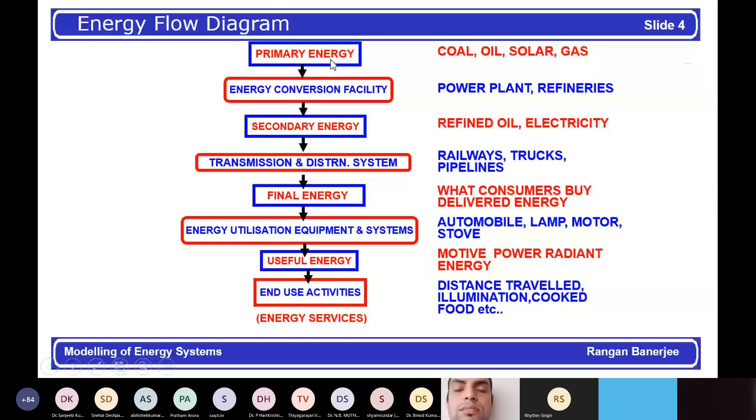Whenever we look at an energy system, it could be something at the consumer side, a transmission distribution system, a power generation system, or a system where you're looking at all aspects of it. So this is in terms of an energy system.

In all of this, we have different types of decisions that we are looking at. We could think in terms of decisions where we are deciding whether or not we should put in a pumping system where you're pumping water. Should I put a variable speed drive on the pump? It's a yes-no kind of decision.

Or I am looking at a boiler or a furnace where exhaust gases are going out. Should I put a waste heat recovery device? This is again a yes-no type of decision.

We could have a best possible among options. I have an island in the Lakshadweep where I want to electrify it. Should I take electricity from the mainland through an underwater cable, or should I put a diesel engine generator? Should I put a PV plant? Should I put biomass? There are a number of different options, and we want to choose the best one.

We can look at a system or a component design. You're designing a heat exchanger, or a maximum power point tracker, or an inverter, or a motor - this is component design. Or you're designing an entire power plant as a system. You have a plant operating, and we decide on operating strategies, or at the government level, we decide policies. So these are all the different kinds of decisions.

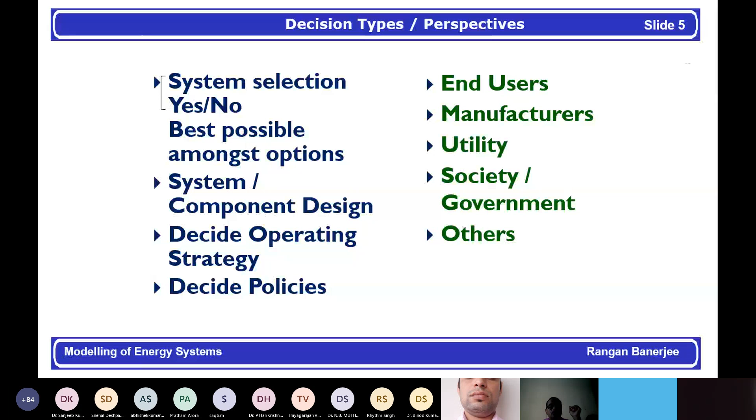Many of these decisions, given that an energy system is linked and complicated, are non-trivial, and we need analysis, and we need these decisions based on sound principles and analysis - that is where modeling can come in. We can look at different perspectives from the point of view of the end user, the manufacturer, the utility, the society, government, or others.

So the question is, what is a model? What models are you familiar with? Why do we need a model? These are the three questions we would like to ask. I'm sure all of you have dealt with models. Can you put in the chat some answers to these questions from your perspective? What is a model? What models are you familiar with? And why do we need a model?

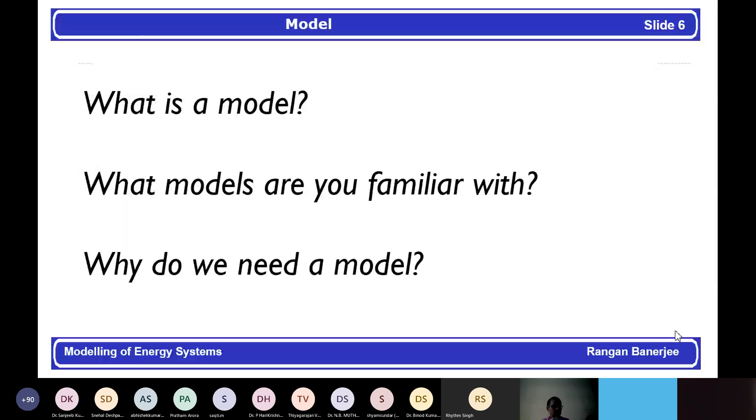Okay, I guess you're hesitant to put things in the chat. Let's just see, you can look at a definition.

The dictionary definition of a model is a replica of something or a representation of something to be constructed. In the typical English dictionary, a model is a replica of something or a representation of something to be constructed. That's a noun, like a model of a building. And as a verb, to model means to produce a representation or simulation of, or to construct or fashion in imitation of. So a model is a representation of reality.

And why do we need a model? Essentially, in all aspects, when we look at trying to construct a building or build a power plant, the actual process of trial and error, making different kinds of equipment or systems without analyzing it, would be a very costly process. So we need to understand a priori, before we actually make it, how it would behave.

In order to do that, we make some assumptions, we create a synthetic system which is very similar to the system that we want to build. We are representing those elements of reality that are relevant to us.

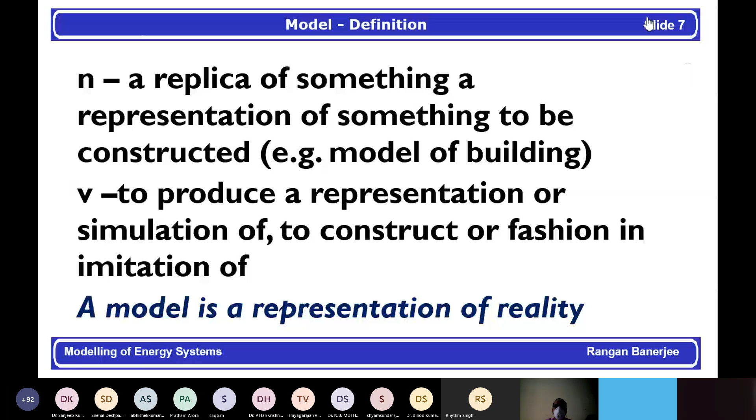So we will make relevant assumptions and create something for the purpose of the decision we are trying to support. It's a representation of reality, representing those elements of reality we are interested in. So we start off model development by defining the goal, why we are doing the model, what decision we are trying to support.

We analyze the situation, identify the variables. In case there is a design element, we can also decide the criteria. We establish some of the equations and relationships between the variables. We analyze the problem, synthesize the problem, link up all these coefficients, and then create the first cut model.

We test that model for internal consistency, validate that model with actual data, and then we have a model that we can use to make inferences and prescribe actions. So that's basically the set of steps in model development.

And how do we decide whether or not a model is good enough? For the same context, depending on the type of decision context, we can have different assumptions and we'll get different types of models. Depending on, suppose you are designing something, many things are open to you, many choices are open, you'll have one particular type of analysis. But once you fix, once you choose and you have an equipment, a power plant, and you want to see how it will perform, then it gets constrained.

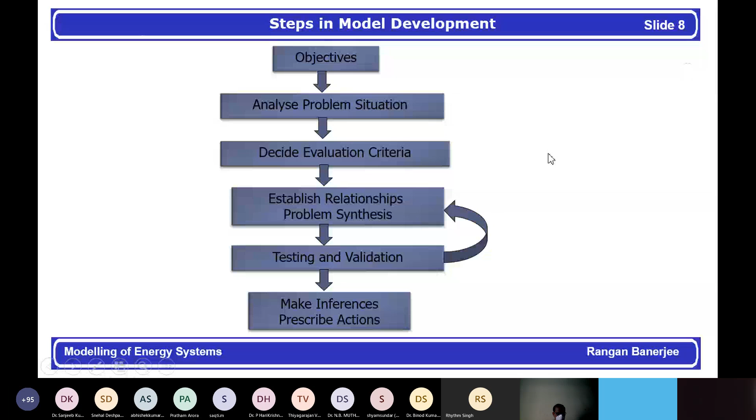Then you have a different type of model. So if you want to find out what is an operating strategy, that would be a different kind of model. Whenever we judge a model, we must look at it in terms of its ability to give the inputs for the decision it is intended for. We also want to see what is the computational effort, cost, and computational time. We would like to judge the model in terms of its accuracy of prediction and its reliability. So these are typically the kind of parameters which we use when we try to do the model.

Now I'll try to give you an example of a model from something many of you would be familiar with. I'm sure many of you are cricket enthusiasts. Are you watching and following the IPL, for instance? In the IPL now we seem to have many of these tied games. The probability of having so many ties in a few games is actually quite surprising.

If you look at cricket before the IPL, the most common and fun form of the game was the ODIs. In the one-day internationals, earlier it used to be 60 overs, then it became 50 overs matches. You had this problem when one team is playing and has played its 50 overs, and then it starts raining, or in between it starts raining. So essentially this was the problem. You must have heard of the Duckworth-Lewis method. What is the Duckworth-Lewis method? What does it do? Please put in the chat.

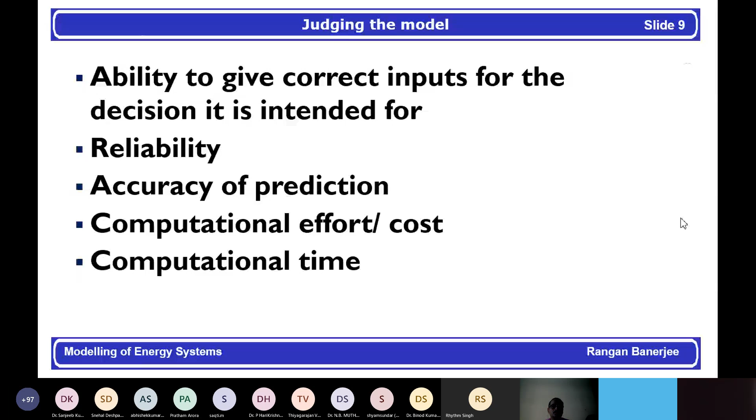Essentially, this is a model, and Duckworth and Lewis are both statisticians. There's a paper, 'A Fair Method for Resetting the Target in Interrupted One-Day Cricket Matches' by Duckworth and Lewis. What they did is analyze the ODI scores and said that the total number of runs you can make is a function of two variables, two resources that you have. One is the number of wickets, and the second is the number of overs. These are the two resources, and then they basically did a regression with the past data, and got a correlation which would adjust the number of overs based on the number of wickets.

So as per the wicket and overs consumed, the run is estimated. You have this estimation, two resources which are overs and wickets, and then an asymptotic average which is calculated based on wickets and the number of overs. These are the correlations that Duckworth and Lewis put together. They put it in the form of a set of equations.

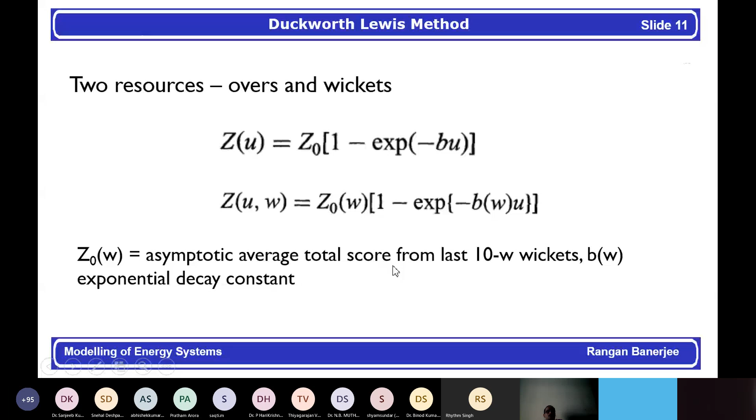They published a paper, and they also patented it. Duckworth and Lewis became millionaires as a result of it. They created a company around this. Essentially what happens is this is an empirical relationship between the different data sets, and that is used to curtail the game -- if rain curtails play, depending on the number of overs and number of wickets, your target gets reset based on this.

There have been critics of this, saying that now the data sets are different as well as the resources are different, and this Duckworth-Lewis method should be modified. There are some papers talking about this, but this is to show you one way in which you can use a model -- using past data to create a correlation, and using that correlation, as has been done in the game of cricket, a game familiar to most of you.

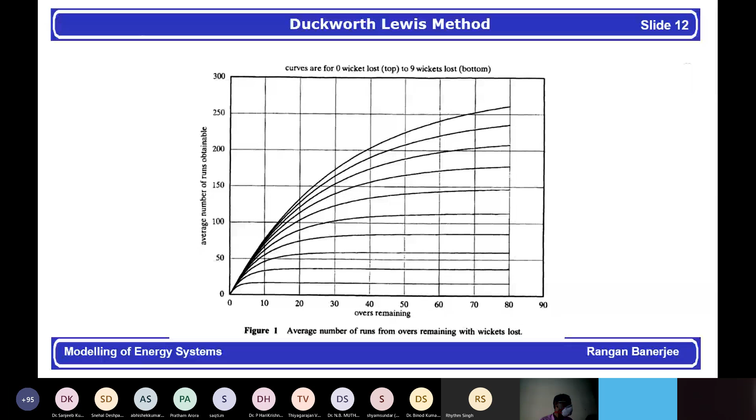So when we think in terms of a model, we have two types of models that we will discuss. One is a simulation model, and the second one is an optimization model. When we talk about simulation, we are looking typically at a system simulation, where a system -- I'm sure many of you teach thermodynamics -- so you look at a system as that area which you are interested in.

In modeling, we look at a system as a collection of different components whose performance parameters are interrelated. We need to club these components together and see what happens when you put them all together. We mean observing a synthetic system that imitates the performance of a real system.

For instance, I have a pumping system in a remote location, currently running on an electric motor. The power supply is erratic. Someone is willing to donate me a diesel engine. I want to know if I connect the diesel engine with the pump shaft, how much output would I get?

So I know the diesel engine characteristics, I know the pump characteristics. I correlate these in the form of equations, put them together and create a synthetic system with these two, and then see how it would perform. This is a simple example of a system simulation.

Why would we like to do a system simulation? Often, when you put different components together, you are looking at something which is an off-design point or an operation at part load. You would like to see how your whole system would work without actually first building that system. That is what system simulation is.

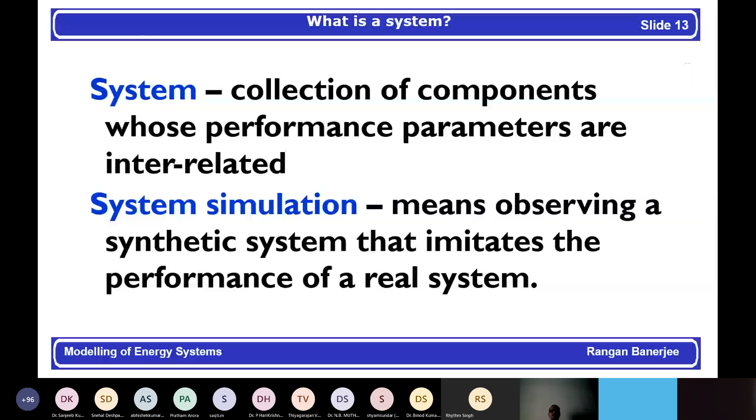For system simulation, what would we need? We would need the characteristics of the different components. Let's say we have a power plant. We would like to see what is in the boiler, which fuel we use, what are the characteristics of the boiler. Then it goes through some heat exchangers, a superheater, a turbine, the condenser, a boiler feed pump. Each of these components has its own characteristics.

When you link them together, you get a model which tells you how the system would work. You need the properties of working substances. In this boiler-steam example, we need the properties of water and air, and we need the conditions imposed by the surroundings and environment.

With all of this, we get a set of equations which characterizes the equipment we have. In this case, this is completely specified, meaning there are no degrees of freedom. We can see under different conditions how it would perform, and that is called a simulation. You put in some input variables, the number of inputs and outputs are the same. You form a set of equations which you then solve.

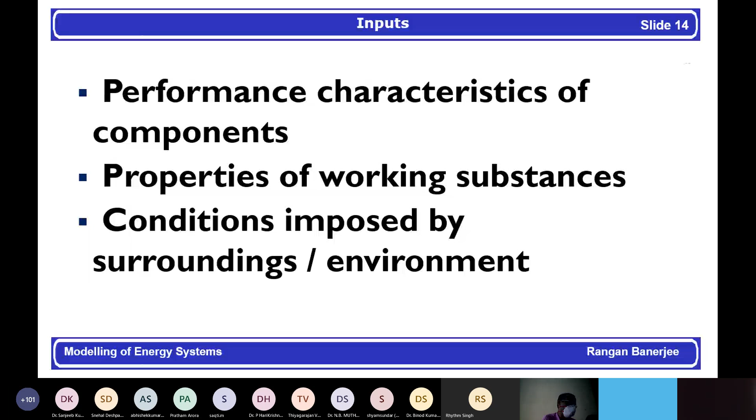On the other hand, you have situations where you have the possibility of design and choice, and variables that you can choose. That means you have some degrees of freedom. When you do that, typically what we do is we optimize—we try to get the best performance.

If you see the classic book on optimization by Beightler and Wilde, it says man's longing for perfection led to the theory of optimization. The German philosopher Leibniz, in the 1700s, said the aim of princes and philosophers is to improve. So in everything we try to do, we try to maximize the good or minimize the bad. That is the theory of optimization.

We try to create a function which correlates whatever parameter we are trying to maximize or minimize, and based on that we make our choices. This is called optimization. We put down all the equations and constraints—some from the variables, some from the external environment—and based on that we set an objective function, which may be minimizing cost, maximizing reliability, or maximizing output. This is different from simulation, because in simulation everything is specified.

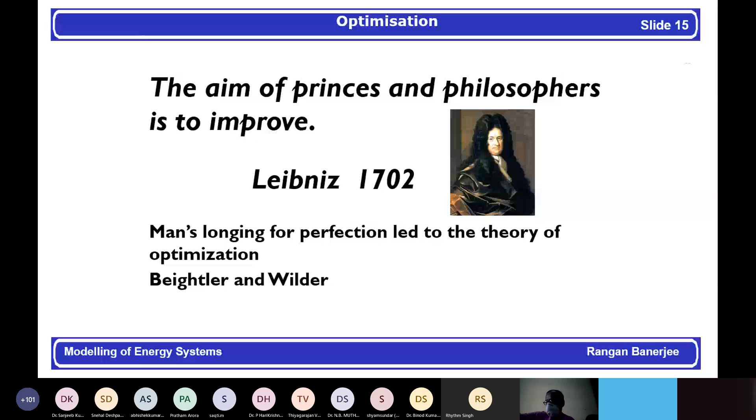In simulation, we just run it and get what the operation will be, what the sets of variables are. In optimization, we are exercising our choice. There is a value judgment in deciding what your objective function is, and we are either trying to maximize or minimize. So these are the two categories of problems—simulation and optimization—and these are the two different categories of models that you would encounter.

Typically, in a necessary condition of optimization, it would need to have an underdetermined system where there is a degree of freedom greater than 1. We would have an objective, and there would be constraints or restrictions, and typically there would be competing influences.

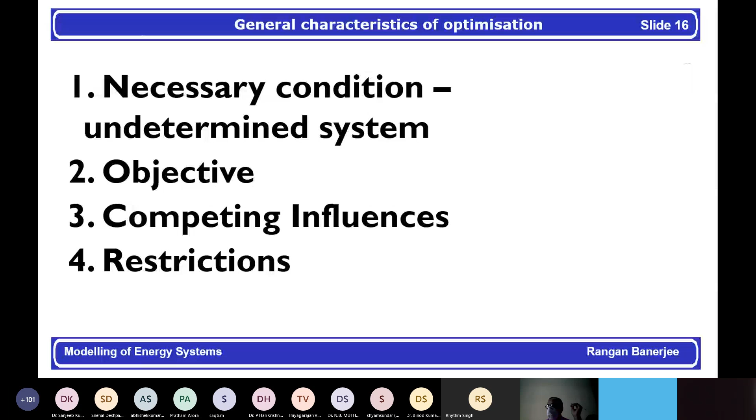So if you look at a pipe carrying hot water and you're looking at putting insulation on that, what happens is if you increase the thickness of the insulation, the capital cost that you have initially to put the insulation, some fixed cost and a variable cost, as you include the layer of thickness, the capital cost starts increasing monotonically with the thickness. And the operating cost, what happens is that the heat loss starts decreasing.

Because the heat loss starts decreasing, your fuel cost gets decreased, your operating cost gets decreased. You can take the capital cost, annualize it, and get a total cost. And because you have these two competing trends, one is operating cost starts decreasing with thickness, and then it sort of converges, and the capital cost starts increasing. Because of this, you have the competing influences and you get an optimal thickness at which you can operate.

So this is just to give you a very simple example to illustrate the trade-offs that are involved and the reason why you would have an optimal. And now, depending on the characteristics, you can have a fairly complicated set of equations and constraints, and you can go ahead and derive and then get what is the thing. So in all of this, you would have some elements of reality, some elements of assumptions, and with this we identify, create the model, and then do that.

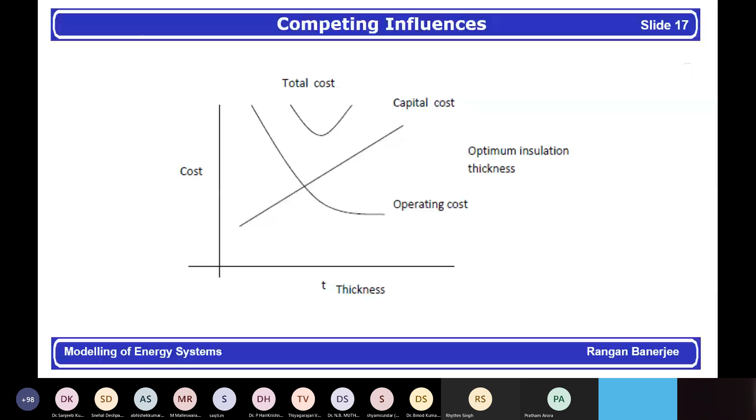We talked about in an optimization scenario, different types of criteria. Usually, most of our decisions are based on costs, either the initial cost, operating cost, or the life cycle cost. We can also look at reliability, availability, or unmet energy in an energy context. Increasingly, most energy systems are now focusing also on emissions, and we can look at local or global emissions. We can look at sustainability. We can look at equity. There are many different types of criteria, and sometimes we also run it with multiple criteria.

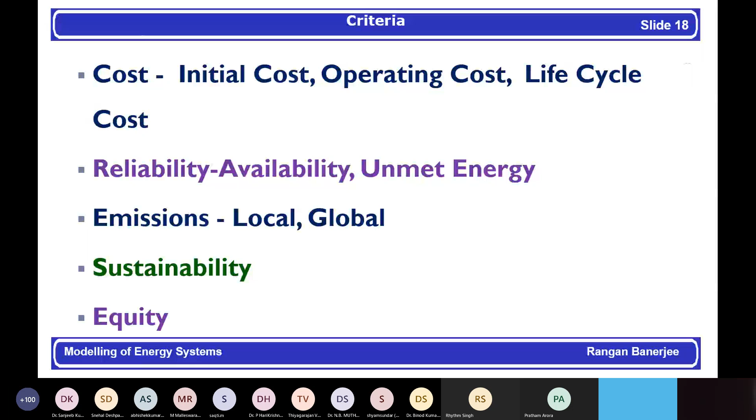Now, it's not necessary that we always optimize, and this is something I would urge you to read these papers. Professor Herbert Simon, he was a Nobel laureate, a professor at Carnegie Mellon University, and he talked about rational decision making in business organizations. He came up with this concept that when you have a large number of options, it is very difficult for any individual or company to really explicitly consider all these options. So you have this bounded rationality, and you need to look at a subset of these options.

Often what happens is that we don't necessarily have to go for the best. We can satisfice - that means any solution that meets our constraints and is within a particular cost and is good enough, and we don't necessarily always need to think in terms of the best.

You look at your decision in terms of how you spend your time, whether on your work, on your preparation for your lectures, on your research, on different kinds of things, and the time which you give for leisure. If you want to create an objective function for yourself, maximizing some kind of utility, you can try and find out what would be an optimal set of things with a different set of constraints. But in many cases, as long as you meet each of your deadlines and you have a certain amount of leisure time, you are fine with whatever solution you get. It's too much trouble to try and find an optimum.

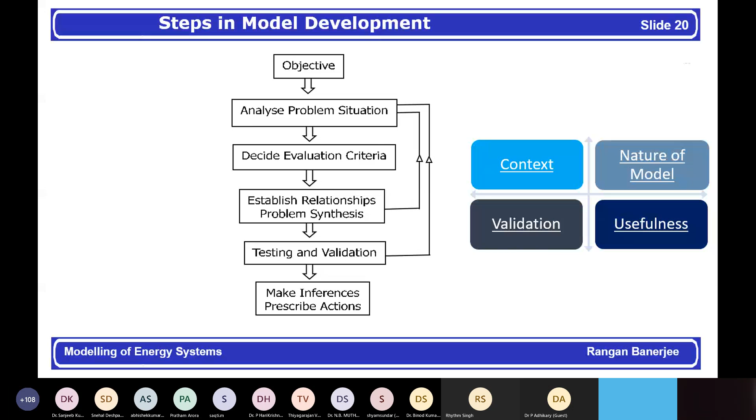We can look at equipment design, and I've got an example of that. We can look at system design - for equipment design I'll talk about linear Fresnel reflectors, for system design I'll look at a glass furnace. I'll talk about microgrids and some buildings. Potential estimation, solar PV, system integration again PV, and policy modeling, one example from energy.

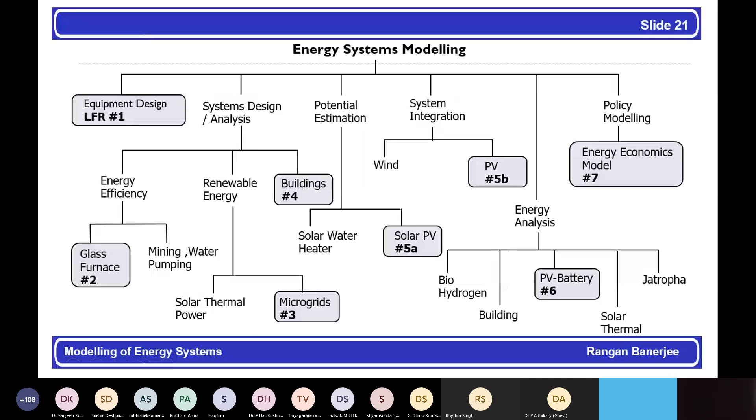So there are about 7 examples, and I've added a few more in each of this - in this case we have 2 examples here and 2 more there, so about 8 or 9 examples. We'll quickly give you a glimpse.

This is an equipment design example. Here the idea is that you have these Fresnel reflectors, where if you look at a parabolic trough collector, if you Fresnelize it, you cut it into sections and make them linear Fresnel reflectors going towards a receiver. Now we want to find out, for this trapezoidal receiver, what would be the heat loss from its surface.

So you have this receiver getting heat from the mirrors, the reflectors, which are reflecting onto it. You have the working fluid, which is water, getting pressurized and heated and going into two-phase flow. We are trying to see, based on the design of this, what would be the performance and what would be the heat loss from this system.

There's an experimental setup which we did along with an industry partner, KG Design at Coimbatore, and we put thermocouples at different points. This model was to design the receiver, and we are looking at 2-dimensional heat, mass, momentum, and energy balances. We used the CFD code Fluent, and then we built correlations for Nusselt number in terms of the Rayleigh number and different characteristics.

So we got an improved understanding of heat losses from LFR cavities, and the effect of variation of different design parameters. This could be useful for component design.

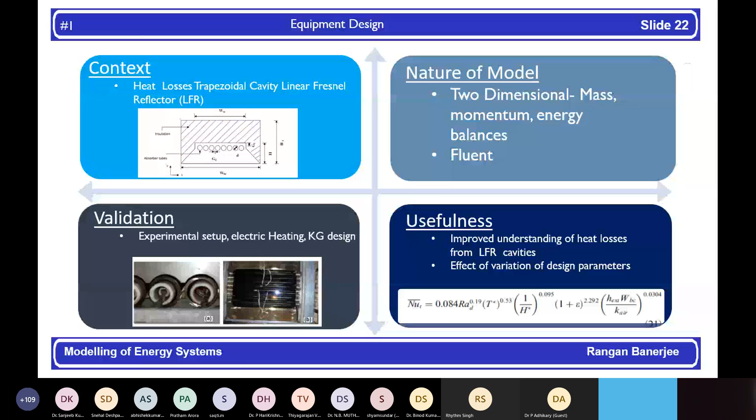So this is the kind of correlation you can see, and these are the Fluent lines which show the temperature profiles and the heat loss from the surface. This is the total heat loss as a function of the tube temperature. So this is one example of a component-based simulation.

Just to give you an example, an indication of how these Fresnel reflectors are used, this is a plant that we built.

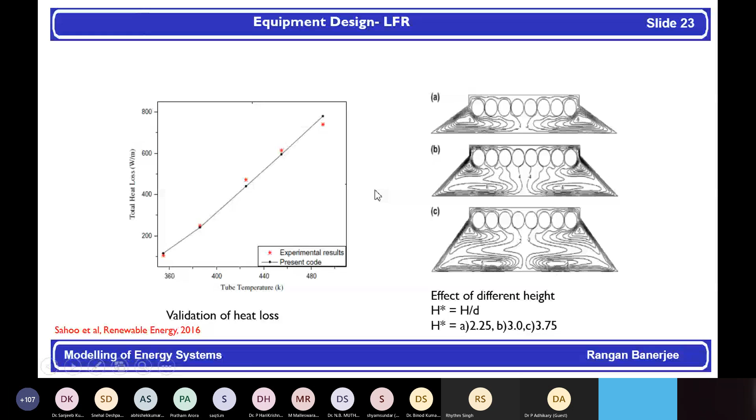We were involved in this as IIT Bombay as part of a consortium. These are parabolic troughs, and these are Fresnel reflectors supplied by KG Design, where we take the water, heat it, and get steam in two-phase flow. This steam gets superheated with the heat transfer oil, and we have a 1 megawatt output.

So this was a test facility that we built. We also had, in the plant, this kind of configuration: this is the oil field, this is the steam field, and this is the turbine.

In this, we built a simulator because this was a 1 megawatt plant, but we wanted to be able to simulate the performance of this plant and then use it for different kinds of plants with different capacities.

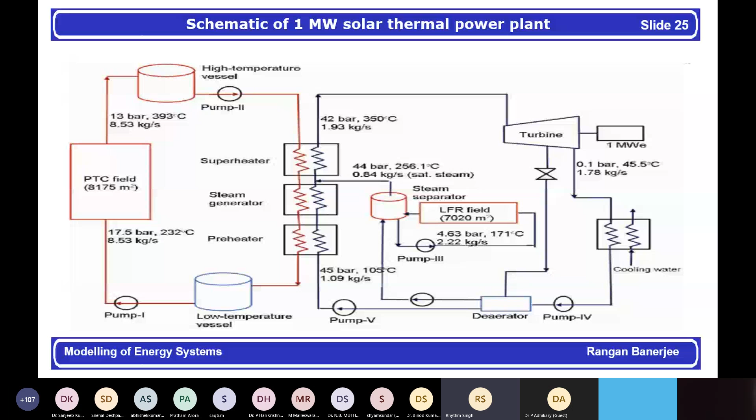So we had this simulator where you can use this performance data, and then you can actually configure different kinds of plug and play collectors, Fresnel reflectors, the turbines, and then see how it will perform.

So you can design a 50 megawatt plant and do this. The idea and objective was to scale up. We validate it using the characteristics that are there, and then move on. So we looked at equipment design and system design for solar thermal.

Let's look at a second example. This is for energy efficiency. We are looking at the process of glass making. It is a very energy intensive process. So we wanted to create a model for the glass furnace and see what is the best performance an existing glass furnace could have. We were also looking at possibilities for waste heat recovery.

So what we did is we broke up the furnace into different zones. We did mass and energy balances. We got heat loss correlations. We then took this model and validated it from industry, doing field measurements for 9 industrial glass furnaces.

Then we created an industry workshop. The idea is that any industry can use this model to put in their furnace characteristics and find out what is the ideal target specific energy consumption per ton of glass, and then compare it with this.

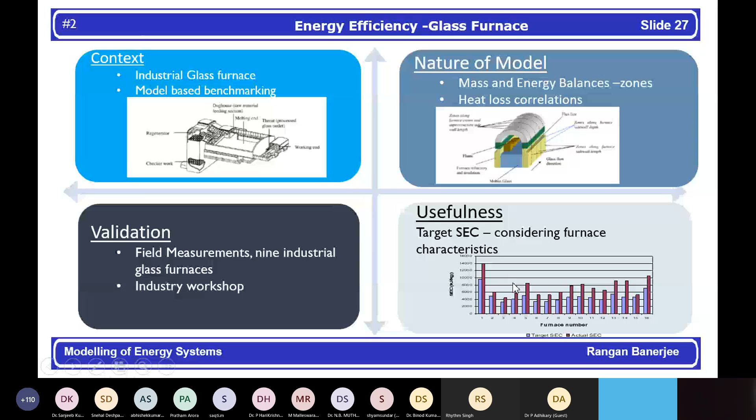This graph shows the comparison in the workshop for the industries that attended and tried to put this in. If you look at this, it's an information flow diagram which looks at all the variables.

You have the air flows and gas leakage, the fuel and stoichiometric calculations, the calculation of the glass reaction, the furnace geometry, combustion zone, regenerator, heat of reaction, and then a total energy balance and fuel calculation.

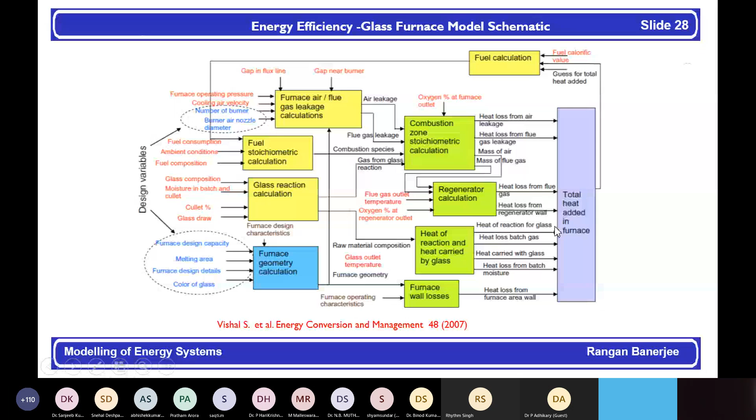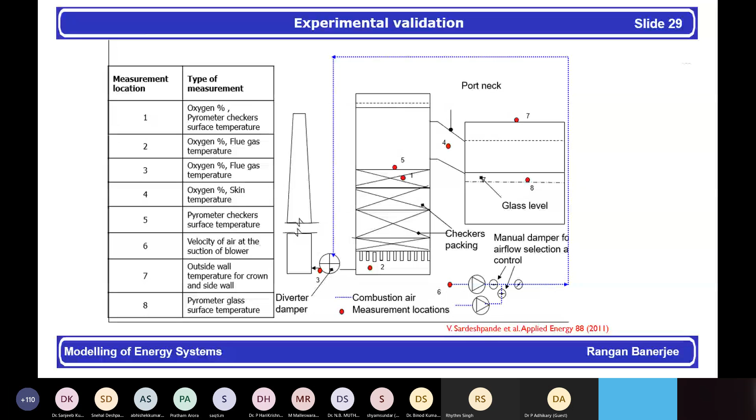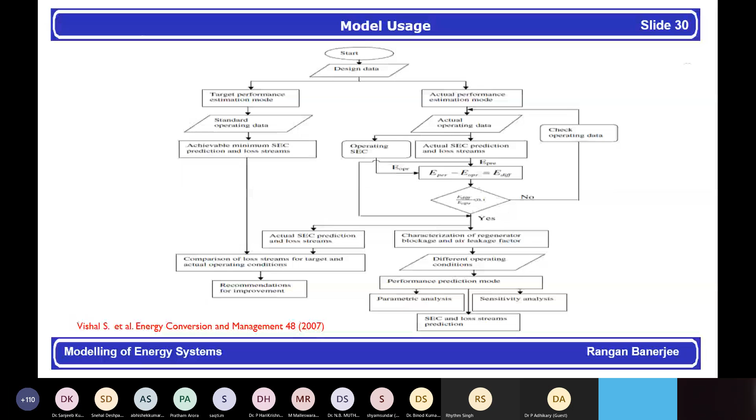As you realize, it's easy to put on a diagram, but actually taking the measurements and computing and comparing it is quite involved. With this model, we can see what is the actual specific energy consumption and what could be the target.

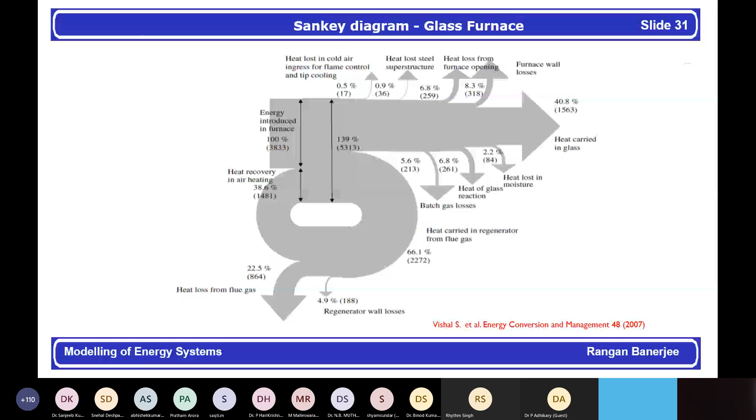And then finally we created a Sankey diagram. You have some of the useful energy carried in the glass, some being recycled through the regenerator, and then the different loss components. The interesting thing is we could also get what is a target for that particular furnace - you have a Sankey diagram and an ideal Sankey diagram, and this model-based benchmarking can help you set a target that is more realistic for your company. So that was the second example.

Let's look at another example: microgrids, isolated or with grid support, in various configurations. We're looking at PV, battery and storage with ultra capacitors, hydrogen storage. We want to look at an optimal sizing of the storage.

We created a lumped parameter model for each component, and then used pinch analysis to do the balancing between supply and demand, using the design space approach, and found out for different time horizons what kind of different storages would be suitable for this.

Validation was done for a couple of sites where we have the load characteristics and the equipment characteristics, and this can tell you based on cost and reliability what the target is.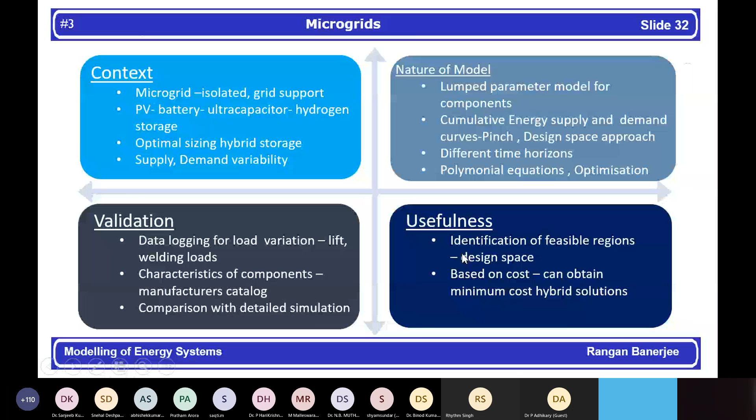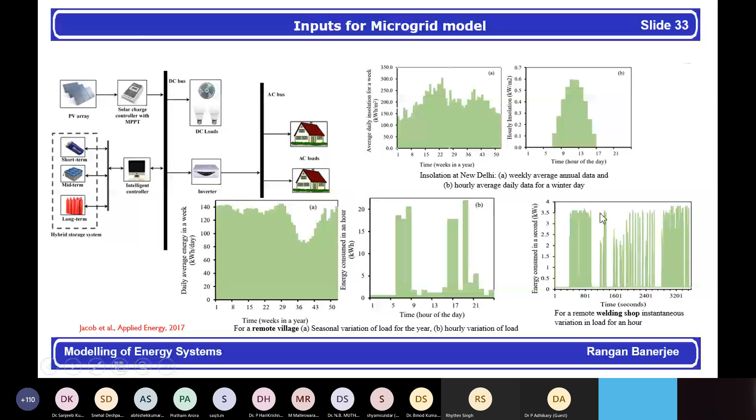So essentially, this is the usage pattern, this is the solar insolation pattern, these are the different types of loads which have been put in the model, and you can see the different components in the system.

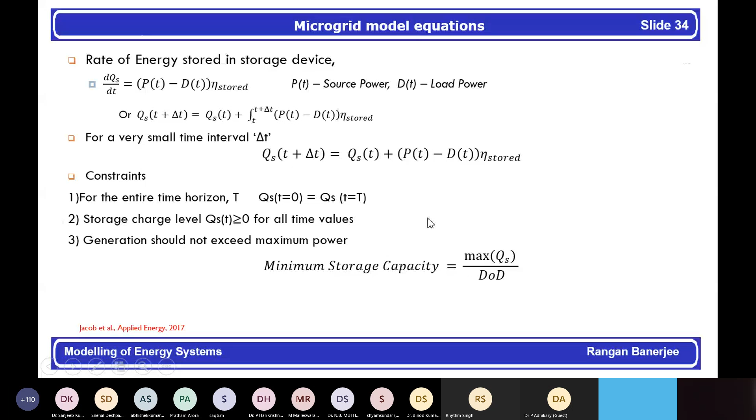Based on this we can minimize the cost for a particular kind of reliability. We tried this with different kinds of storage, and then we got an optimum configuration with PV, fuel cell, hydrogen, etc.

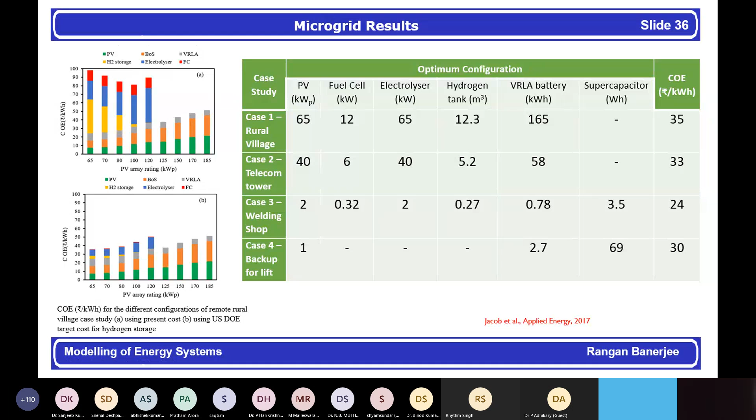The costs are quite high if you do an isolated system, 24-30 rupees, but that is currently the situation. Of course, as technology improves, these costs can come down. This is a way in which we find how to meet that requirement, matching the supply and demand in order to minimize the cost and identify different kinds of storage ratings.

Let's look at buildings. Buildings is another very important area where you can have different kinds of models. Let's show you two types of models. One was done by one of our teams, Team Shunya, which was the first Indian team in the Solar Decathlon, where we built a completely fully functional solar house.

The next part is when you look at a building and try to simulate it, using simulation with Energy Plus and Design Builder. When you try to optimize, there are a large number of variables.

So what we did is a detailed simulation with the different variables. Then we used the Taguchi method to identify different sets of parameters, and we created surrogate models to approximate the simulation. We used experimental design, factorial design, response surface methodology, and then identified using optimization with genetic algorithms the best space and minimum cost solutions.

Validation was done by using this method with Energy Plus, and we had an error of less than 10%. We did this for two typical cases: Team Shunya, as well as a three-storied house in Delhi, which was part of a particular competition where we had all the database data for it.

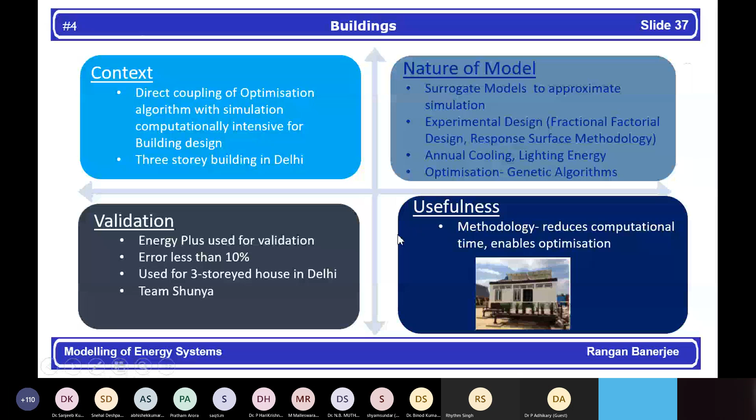The methodology will reduce the computational time, and we can basically do a near optimal solution using our surrogate. This was a PhD thesis of Jay Dhariwal.

Before that, let me just show you, this is the actual image of the Team Shunya house, a 680 square foot house with 5 kilowatt PV peak on top, solar thermal.

We used phase change material, and this is a compact kind of layout with 2 bedrooms, one drawing and living room which also serves as a kitchen and dining area, and we have 2 bathrooms in this.

And this was the kind of building envelope. Typically what we did is we started with the initial loads and then started putting in different kinds of solar passive concepts, and we could reduce the total air conditioning requirement.

This is a fully air conditioned house, reduced to about 30% of that, and then met that requirement with renewables. During the competition duration, you can see that this is a completely energy positive house.

This was first simulated using Energy Plus, and then we rebuilt it and took that to the competition. These parameters were actually monitored during the operation of the competition.

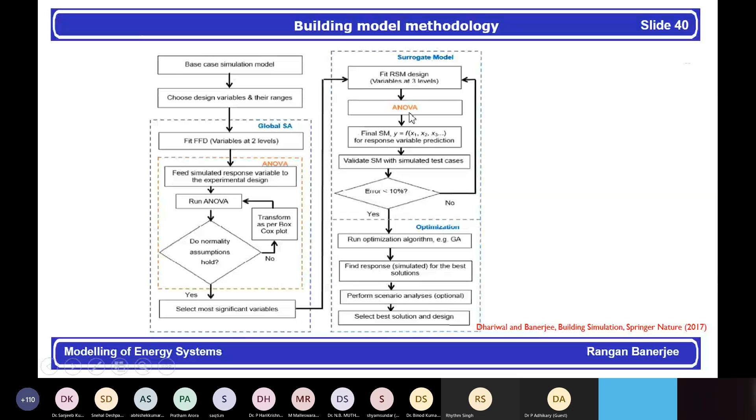Now we come back to the second thing where we were looking at creating a set of surrogate models. We created these by doing simulation, and we optimized based on the surrogate models and got the optimization.

So here we have a whole set of discrete variables: window to wall ratio, the solar heat gain coefficient, visible light transmittance of the windows, overhang depth, fin depth, a whole set of different parameters from this 3-storied building which is being designed.

In each of these there are different combinations, so you have a large number of combinations that you can handle. We simulated this using Energy Plus, and after doing this simulation we got the performance and the costs, the capital costs and the operating costs, and then used this to generate empirical correlations.

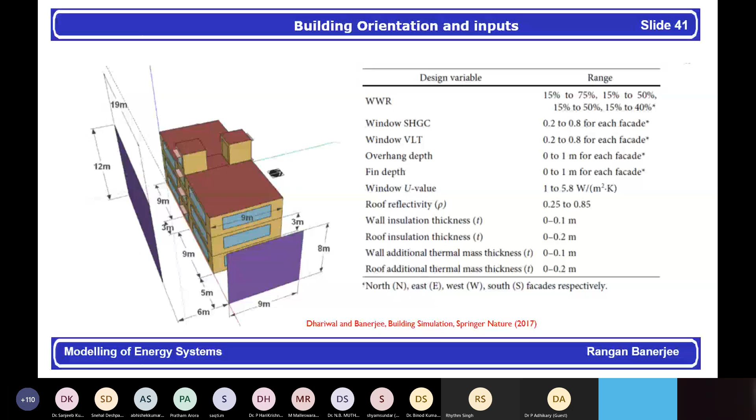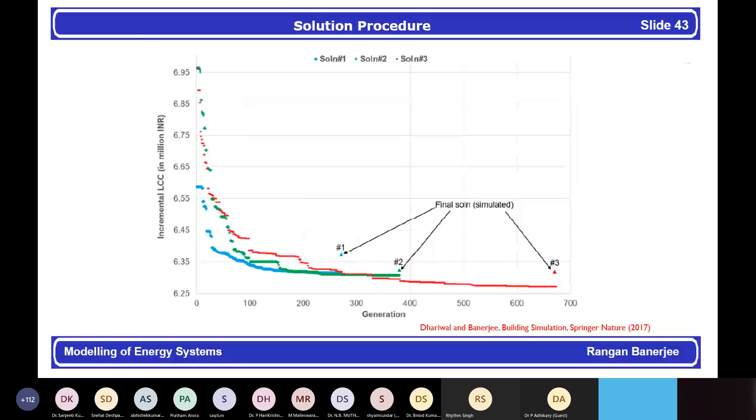These are some of the building correlations that were developed with these parameters. With this, we got a solution procedure where we use genetic algorithms to get the final solution. Because the large number of options makes complete optimization untenable, we make an approximation, validate it with detailed simulation and performance data, and use that simplified model to get the optimal. After we get the optimal, we can do a detailed simulation for that case.

The next case I'm going to show you is work done by Professor Rhythm Singh during his PhD, where we looked at estimating the rooftop PV potential in a city. The idea is that in the solar mission, we are supposed to have rooftop PV, but actually it's mostly ground mounted, and rooftop is not growing at that rate. The model has different components: estimation of area, insolation, and PV device and system characteristics. We validate it with samples for land use, comparison with literature, and load profiles, and this can be used for a variety of cities.

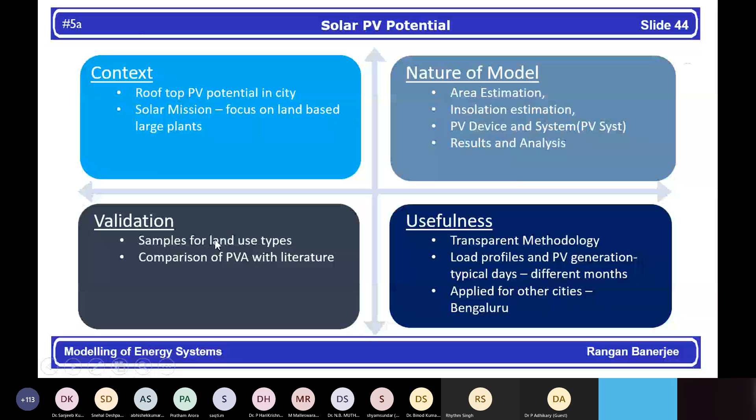Essentially we have an area estimation block, an insolation block which is the solar characteristics of a location, and a PV system and device block. We combine these, and then you get the technical potential, and different estimates of how much you can generate over the period of the year.

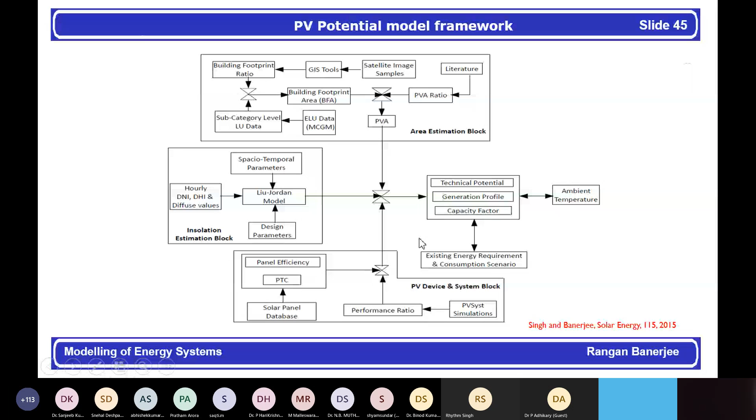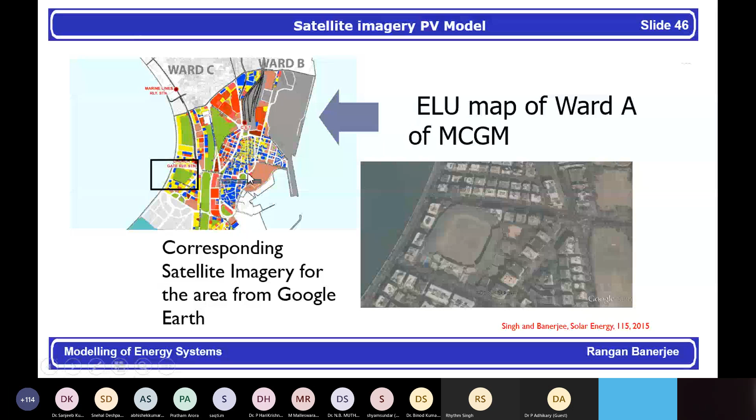For a particular ward of Mumbai, you can see this map, and correspondingly get the GIS and satellite imagery, the land use and land cover types, and the roof area and building footprint. Based on this, with the characteristics, the final model shows the Mumbai load profile, the total PV potential, the amount you can generate, and the capacity factors for different cases.

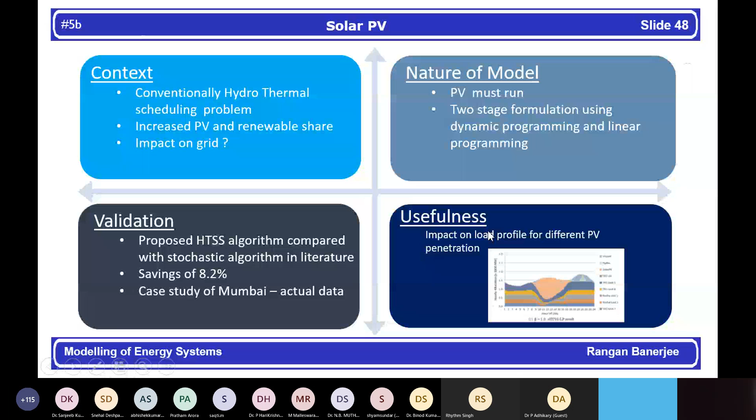A comparative case: if you had a large amount of PV in a system that was basically thermal and hydro, this next model looks at hydrothermal scheduling using dynamic programming, to see how, with increased PV and renewable share, you look at dispatch and scheduling. You have an algorithm for a case study of Mumbai, and this is again something Dr. Rhythm had done; you can see details in some of these papers.

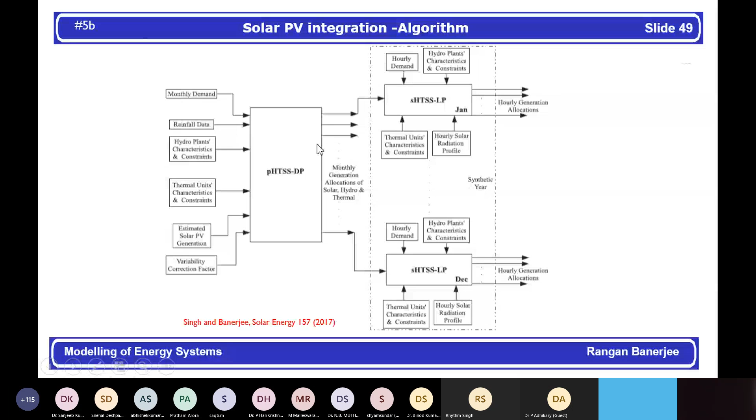We have each of these load profiles, some daily load profiles, and the scheduling of the hydro and thermal given the PVs. Mostly these PVs are must-run. We are trying to minimize the overall cost, and then you get for the city of Mumbai what kind of ramp rates are required, and the amounts being generated by different supply sources.

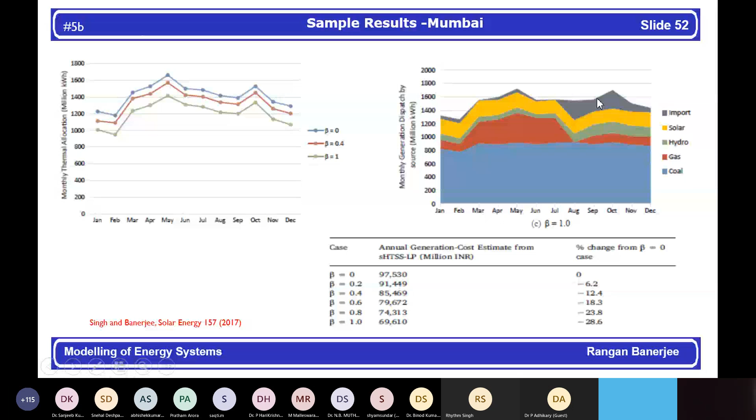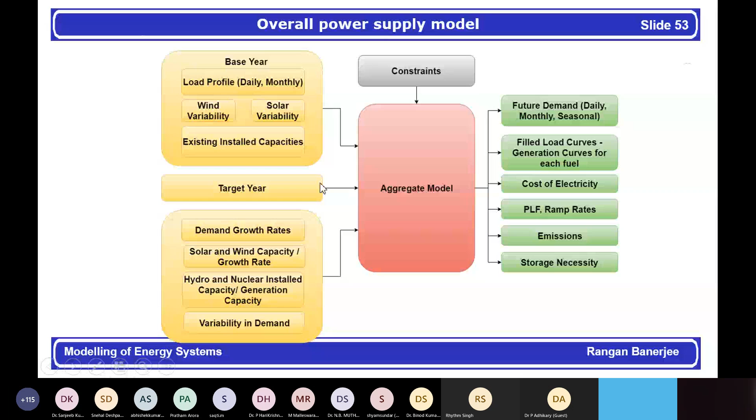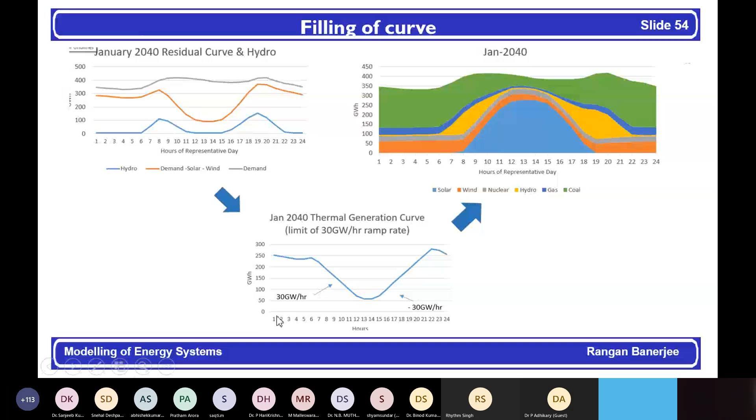We can cross-check that and see whether or not the capability of the power plants is there. This is what is called the duck curve. Depending on different PV penetrations, there will be a point where every amount of electricity you are getting has to go through storage. So essentially, if you have a higher penetration of PV beyond a point, you start having to take everything to storage, so the cost will then go up. That is the kind of system we are going to come to soon as PV penetration increases. Today we are not yet looking at that, but this is where modeling can tell us a number of things.

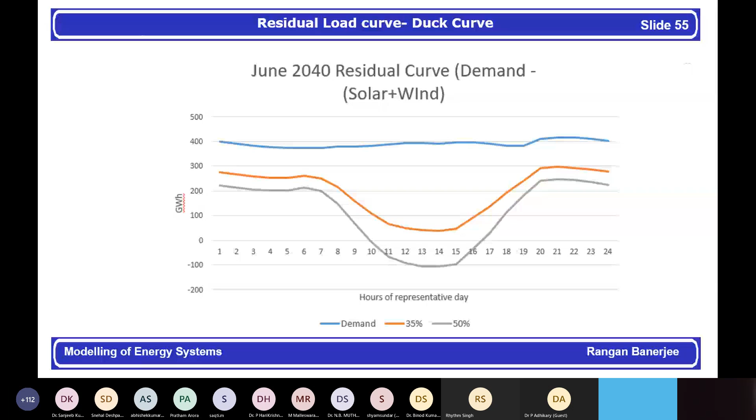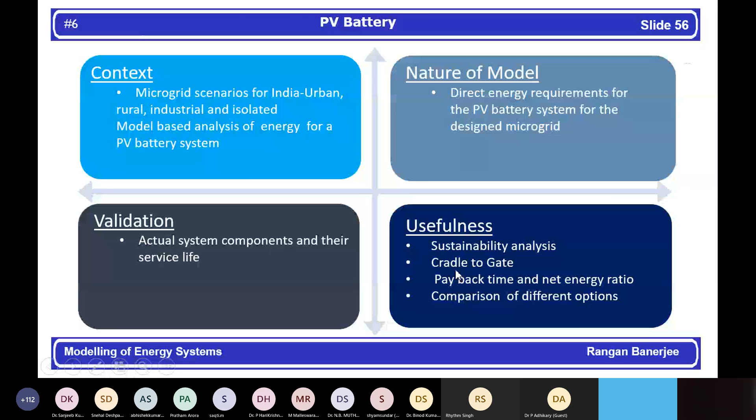For the PV battery system, we want to see overall how sustainable is a PV battery system, and here we want to look at different types of batteries. We are doing a net energy analysis here to try and see cradle to gate, and look at payback times. This has been done by Jani, who has finished her PhD and is now teaching at an engineering college.

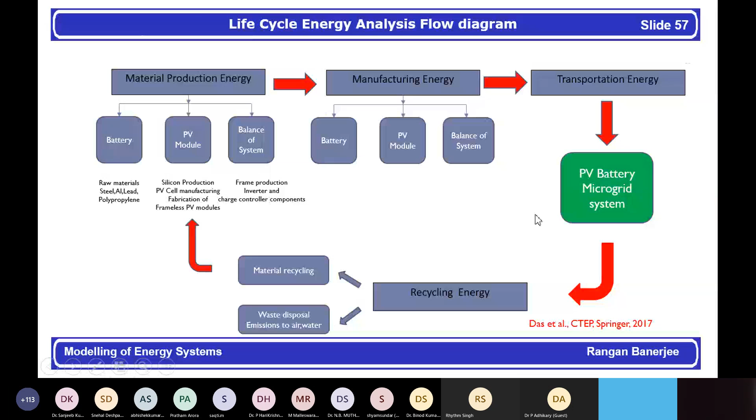We look at the amounts of material, the manufacturing, the transportation, and then the end of life. For each of these we can compute, and then based on the generation we can see how much is the embodied energy, how much is the energy payback period. These are the different components.

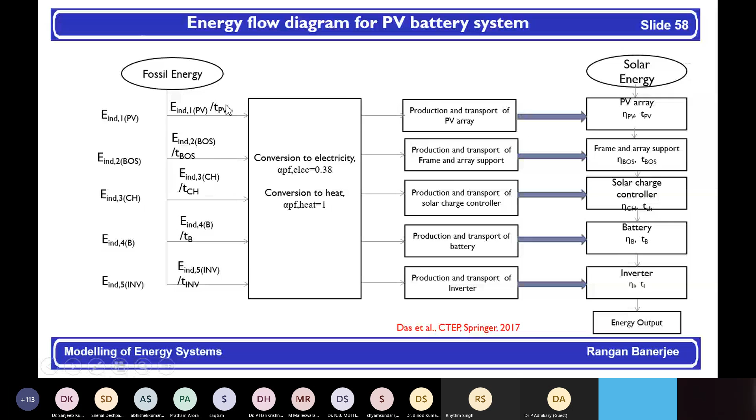The first part in silicon is per kg of silicon, then here it will be per kilowatt peak of panel. We get the total energy consumed, and then we can try this.

We've tried different kinds of batteries: lead acid, lithium ion, nickel cadmium, sodium sulfur, etc. A whole set of things. For each of these we've compared them based on the energy component, the emission factor, energy payback percentage of the cycle life, the net energy ratio, and emission factor.

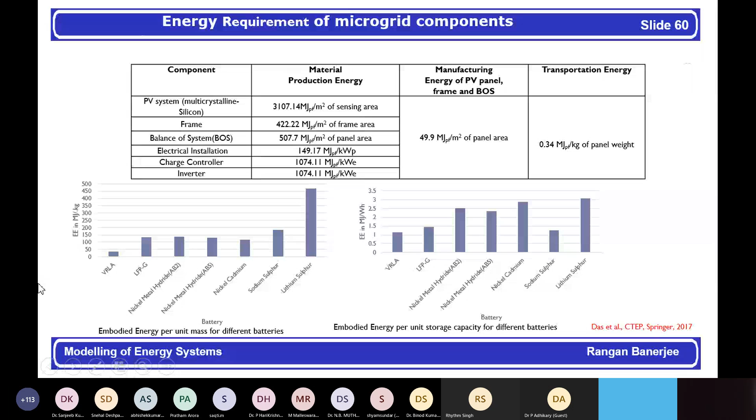So we are saying that when you have a new technology, we can actually look at the life cycle energy and life cycle emissions and use that as a basis for making your calculations.

I'm sort of running out of time. I'm going to look at the last thing where, instead of just technical systems, we can also club this with the economic system. This is an energy economics model where we look at what happens when we have different sectoral mixes.

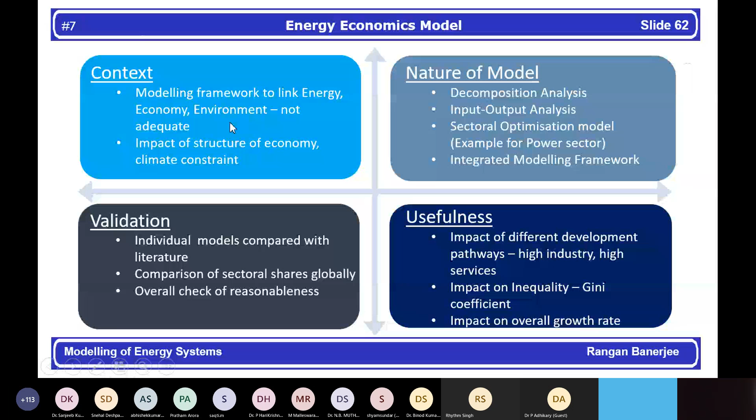This is a modeling framework to link energy, economy, and environment, and this has not been adequate. We want to look at the impact of the structure of the economy and the climate constraint, what happens if you have more industry or more services.

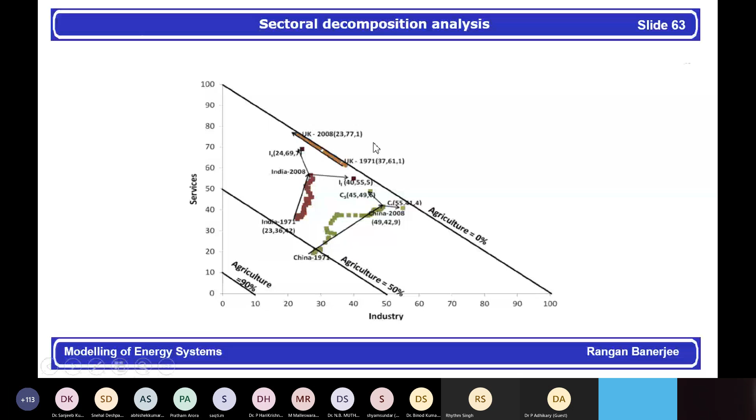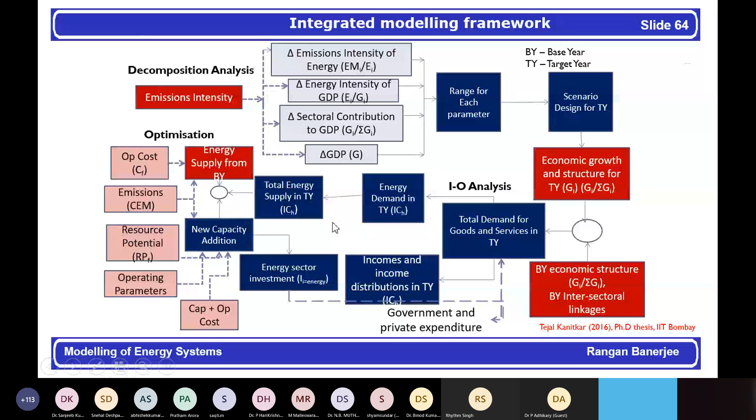So we created a soft linking of different types of models. There's an input-output model for the economy, and there's an optimization model, MARKAL, for the power sector. We tried to see what happens if we are making more investments in the renewable sector, under high services, high industry, and carbon constraints versus no restrictions on emissions. We saw there is some impact in terms of GDP and equity when you do this. So these are again some interesting things which come up in terms of modeling.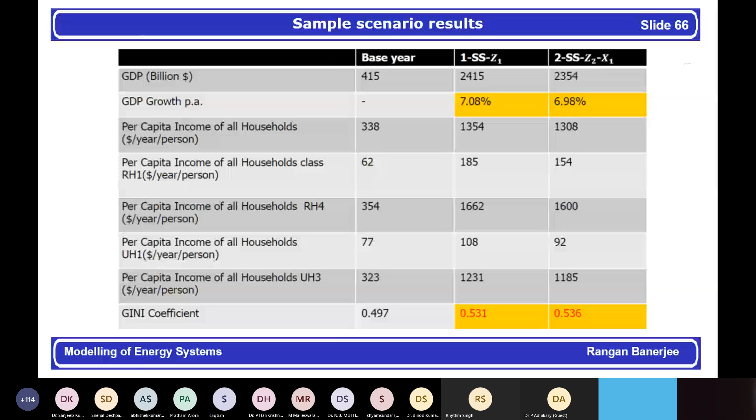So with this, what we've seen is a whole spectrum of different kinds of applications of models, from components to systems to energy economy systems.

Just to repeat, models are representations of reality. They can help us in improving our decision making and what-if situations. There are value judgments, there are trade-offs between criteria, and we can look at optimizing and satisficing. We should also look at the sensitivity of the input parameters and how robust our results are. We can use a blend of models and prototypes to develop future sustainable energy systems.

Energy systems are in transition, and there are lots of challenges and opportunities for all of us. We need new modeling systems and new modeling paradigms to analyze some of these transitions.